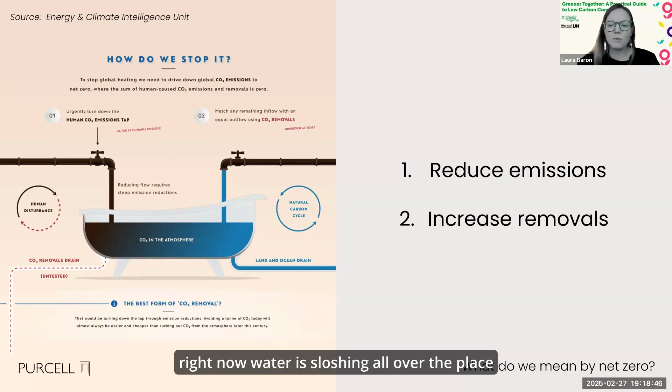The more greenhouse gases in the atmosphere, the more heat is trapped, causing the Earth's temperature to rise and leading to climate breakdown. So really, really simply, if you think of the atmosphere as a giant bath, right now, water is sloshing all over the place because the water pressure is far too high and something's blocking the drain. And if we don't do something, the whole bathroom will be underwater quite soon.

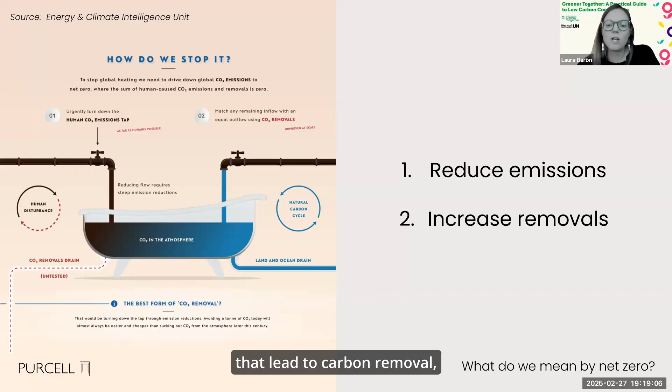So we need to get the atmosphere back in balance and urgently turn down the human carbon emissions tap, and both safeguard and enhance the natural cycles that lead to carbon removal, like halting deforestation, improving soil health, and looking at other techniques like biomass sequestration, storage, and ocean-based approaches like kelp farming. Avoiding emissions now will almost always be easier and cheaper than sucking out carbon from the atmosphere later in this century.

So 2050 is the internationally agreed target for achieving net zero, to have any chance of keeping global temperatures within a safe and just level for humanity. And that temperature is agreed at 1.5 degrees above pre-industrial levels in the Paris Climate Agreement. But we can already see that we don't have any time to waste.

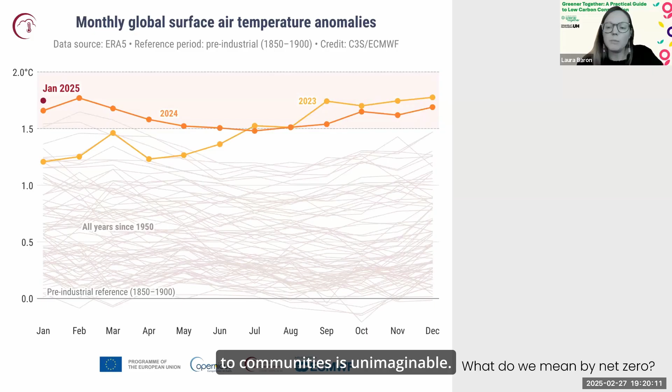2024 was the hottest year ever recorded, and the records haven't stopped so far this year. January reached global average temperatures of 1.75 degrees above pre-industrial level, and was the 18th month in the last 19 months for which the global average surface air temperature was more than 1.5 degrees above pre-industrial levels. And the damage that's having around the world to communities is unimaginable, and I'm not going to dwell on that, because I think we're all here hopefully to focus on solutions this evening.

There is one number that I do want you to remember though, and that's 4,434, because that is the estimated number of tons of carbon dioxide that, if emitted today, cause one excess death between now and the end of the century. So to put that into context, the whole life carbon emissions of a typical new build residential development is about 3,000 tons of carbon. So there's a lot to do.

So I noticed that there's lots of different people from different backgrounds and professions, but I imagine that you've all got an interest in the built environment. Regardless of your motivation for being here, regardless of your background, you will likely spend around 80% of your time indoors. We all have an active stake in the built environment. We inhabit buildings the majority of the time. When we travel, we're probably traveling between one building and another building. We sleep in buildings, we work in buildings, we socialize in buildings, we imagine in buildings, we create in buildings.

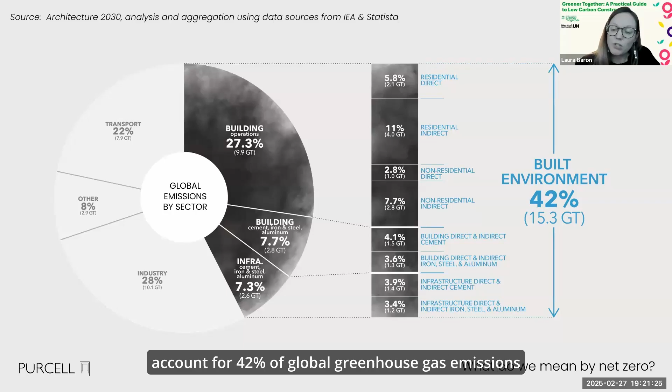So buildings and the infrastructure that connects them account for 42% of global greenhouse gas emissions, and 27.3% of that is how we heat, power, and operate the buildings that already exist. 7.7% is the materials we use to construct new ones, and that's embodied carbon, which most of you are probably already aware of. Because buildings are such a huge part of the problem, it also means that they can be a huge part of the solution. So reducing operational emissions and rethinking the way we use materials is the only way we're going to get anywhere close to net zero in the coming decades.

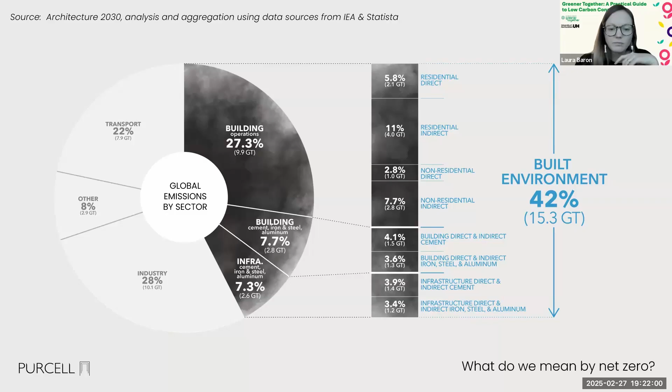So understanding the impacts our buildings are having is essential. And I know there is a session on whole life carbon, but I'm going to just skim through where greenhouse gas emissions relating to buildings can come from. They can come from a number of different sources at a number of different stages in a building's life. So looking sequentially from the raw material extraction and supply, transport of those materials to a manufacturing plant, and the manufacturing and fabrication processes that create new materials and products, the transportation of those products to a project site and the emissions relating to that transportation, as well as the construction and installation process.

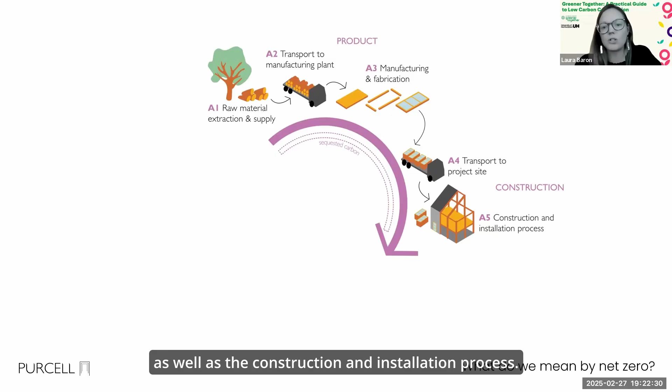And then obviously once a building is complete, the in-use emissions for embodied carbon, that means the maintenance, repair, replacement and refurbishment of a building. Operationally, it is how we heat, power and supply our buildings.

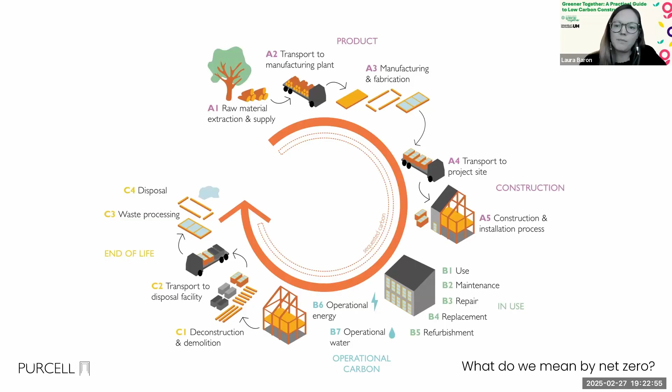Then there's the emissions associated with the demolition and deconstruction of a building when it comes to the end of its life, the transportation of those waste materials, and the emissions associated with the waste and disposal process. But then there might be future opportunities and benefits of reuse, and the more existing materials we reuse, the lower the emissions associated with new material extraction.

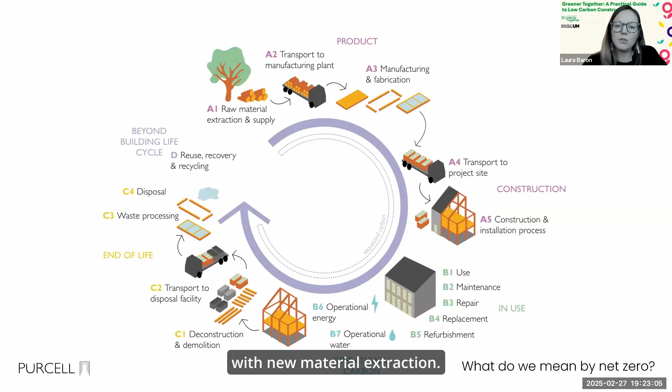And so it's really important to consider all of these processes, regardless of the project, whether it's a new build or a retrofit, because only by accounting for the emissions throughout the whole life of a building can you understand how you achieve a net zero building.

And so some of you may be aware of the UK Net Zero Carbon Building Standard. Some of you may have contributed to it. The pilot version was launched this year. It is the first attempt to robustly define what net zero carbon means for buildings in the UK.

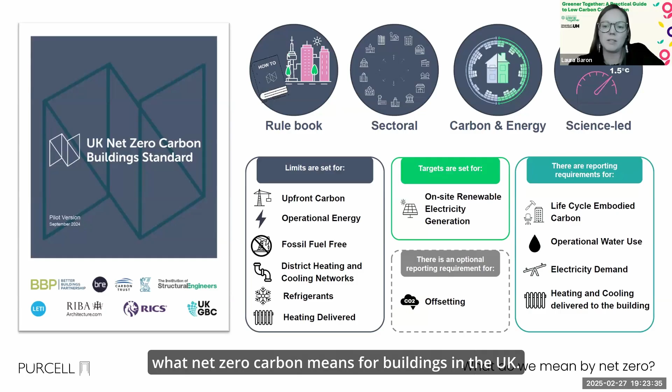So the standard provides a set of consistent rules to create a level playing field around the claims of net zero. It sets performance targets for both new builds and existing buildings, which are aligned with the science-based trajectories needed to achieve net zero by 2050. And that assumes a 78% reduction in emissions by 2035 for the UK.

So the standard is for anyone who wants to fund, procure, design or specify a net zero carbon building, and for anyone who wishes to definitively demonstrate that their building is net zero carbon aligned. It has been developed and agreed through collaboration between built environment organisations and industry leaders, architects, engineers, carbon assessors, developers, with input from over 350 experts from across the industry.

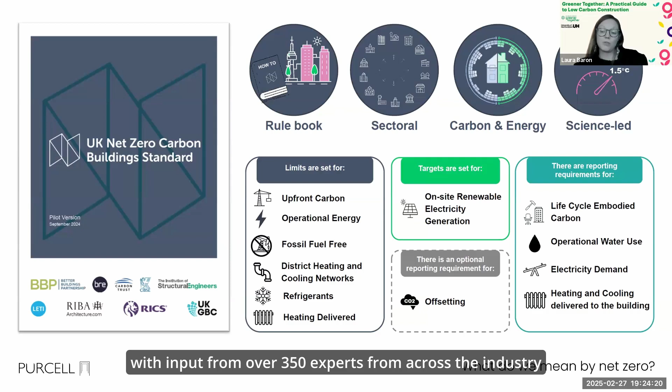And it's quite an amazing milestone. It's quite an amazing feat of collaboration and really worth finding out more information if it's an area that you're working in. I was not one of those 350 experts, so I'm not going to pretend to be an expert in this, and I'm not going to go into more detail than that.

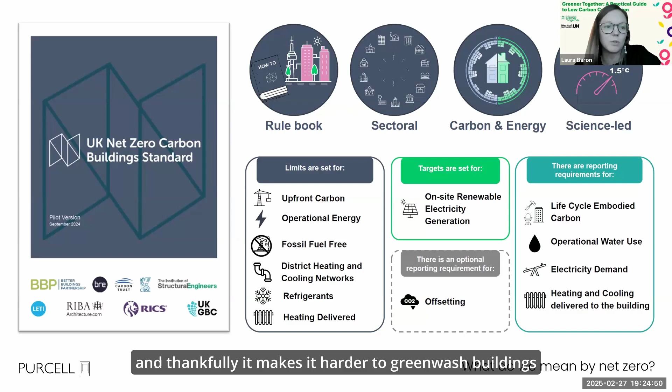But the pilot version is being tested this year with the launch of version 1 planned for next year. And from my point of view, what it really means is it hopefully and thankfully makes it harder to greenwash buildings by claiming net zero when they aren't.

So that was a whistle-stop tour of a lot of information that hopefully you're already kind of aware of. I can't see the chat, but if there's any questions so far on any of that, it might be a bit too early to dive into any. As I say, I can't see the chat. So Luigi, just shout out if there are any. There are no questions for now. Okay, cool. I will keep going.

So the next bit, I'm just going to talk about why retrofit is essential to net zero, and it might already be very obvious to a lot of you. This is quite a familiar statistic to lots of people. So 80% of buildings which will be occupied by 2050, and remember that 2050 is when we're supposed to have achieved net zero, already exist today. So decarbonising these existing buildings is a major priority, whether we like it or not.

But on top of that, the amount of anthropogenic mass, so that's the materials embedded within inanimate, solid, human-made objects, things like concrete and bricks and metals, that mass exceeded the weight of all global living biomass. So that's plants, animals, bacteria, fungi, and that happened in 2020, and we haven't reversed that quite terrifying milestone.

So it's really clear to me that we need to agree that we have enough stuff. We need to nurture our natural resources rather than destroying them. And we need to stop extracting 100 billion tons of raw materials out of the fabric of the planet each year, 50% of which, by the way, is used in construction.

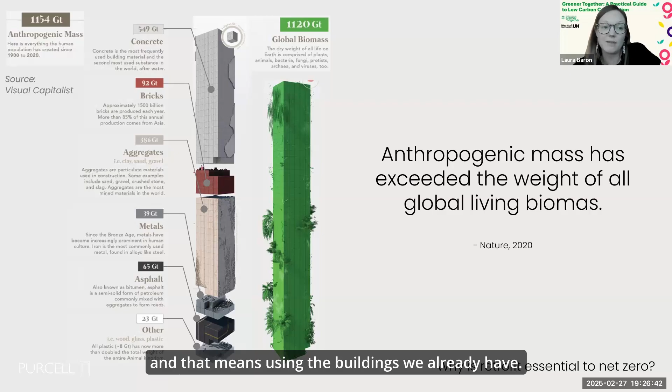We instead need to look to this existing anthropogenic mass as our resource instead of continuing the destructive take, make and throw away cycles. And that means using the buildings we already have. And I know Duncan Baker-Brown will cover the circular economy in much greater and more expert detail.

But the construction industry generates 62% of the UK's waste and 32% of all waste that is sent to landfill in the UK. And again, the solution to this is we need to make use of the buildings and materials we already have and stop sending them to landfill.

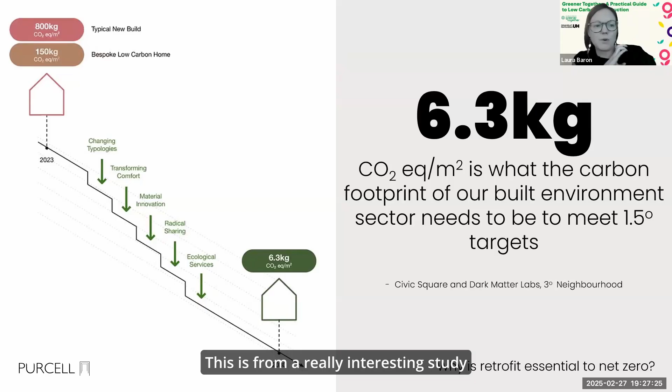Even the most low carbon home built today is still 24 times the carbon emissions every new home will need to be in 2030 if we are to meet the 1.5 degree target that is agreed. At the current pace, we have 5 more years of carbon budget for building new homes at their average current embodied carbon. This is from a really interesting study that's worth having a look at by Civic Square and Dark Matter Labs called the 3 Degree Neighbourhood.

And again, the solution to this: reuse the buildings and materials we already have. And I reflect often on these words of the French architects Lacaton and Vassal. So never demolish, never subtract, remove or replace, always add, transform and utilise with and for the inhabitants. And I think there you can find some really imaginative and inspiring architectural solutions when you take that approach.

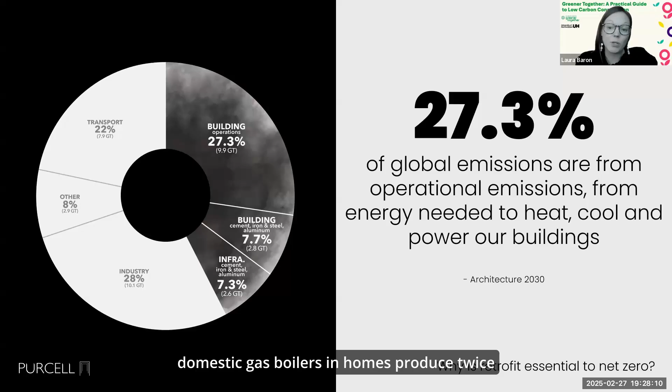But our existing buildings are far from perfect. They are still responsible for 27.3% of global emissions through their heating, cooling and powering. And here in the UK, domestic gas boilers in homes produce twice as many greenhouse gases as all the gas-fired power stations combined. So again, it's not a small challenge that we're facing.

It costs the NHS £1.4 billion a year to treat people impacted by poor quality housing. And when you add on the full cost for society, like the cost of care, loss of productivity and time off work and things, poor housing costs the UK £18.5 billion a year. There's 2.6 million homes in England, which is 11% of the country's housing stock, which are categorised as hazardous to occupants. And the costliest issue for the NHS is poor quality housing that leads to excess cold and damp, usually caused by poor maintenance, lack of insulation and lack of ventilation.

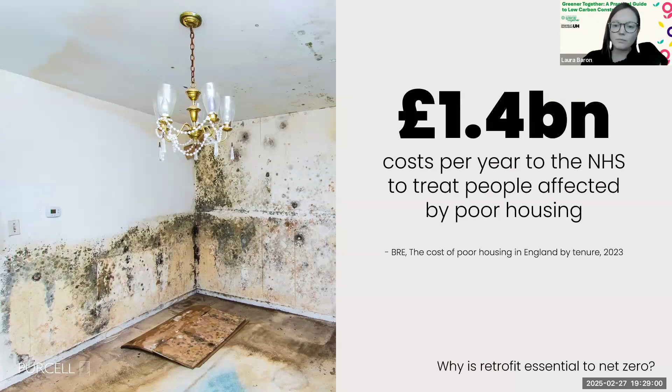In 2022, instability in energy markets, coupled with some of the most energy inefficient housing in Europe, led to 13.4% of households in England living in fuel poverty. So that's when a household needs to spend at least 10% of its income on maintaining a satisfactory heating regime.

And it's obviously not just about being cold, as we saw earlier on in the presentation. 2024 was the hottest year on record and likely the warmest in at least the last 125,000 years, even though it didn't necessarily feel like that in the UK. It's now more than likely that those born today will experience a planet that exceeds more than 3 degrees above pre-industrial temperatures, and anything above 1.5 we will see from where we stand today, to be honest.

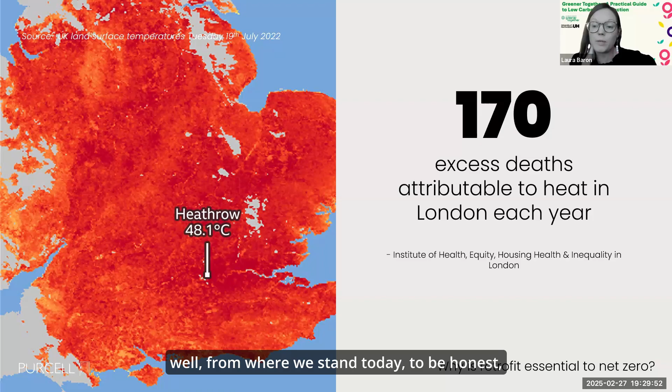Flooding will happen more often and cause a greater degree of damage to our homes and communities. Storms will be stronger and more frequent, damaging power lines, homes and transport links. Summers will be hotter and likely dangerous, and the loss of predictable seasons will lead to food insecurity and global instability. So retrofit must be about carbon emissions and net zero, definitely, but it must also be about resource use, about health and well-being, equity and energy security. And we need to be aware of and prepare for the worst future climate, but also build towards a more resilient and hopeful future.

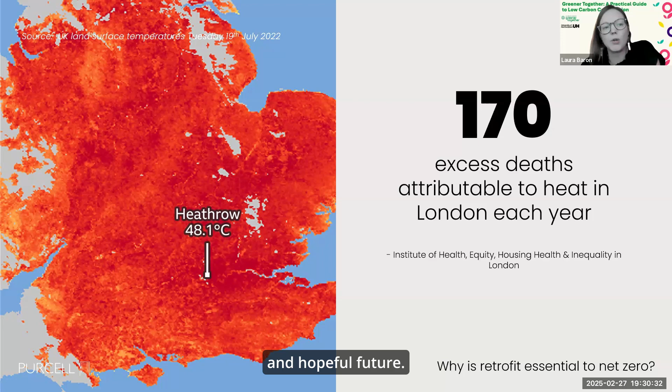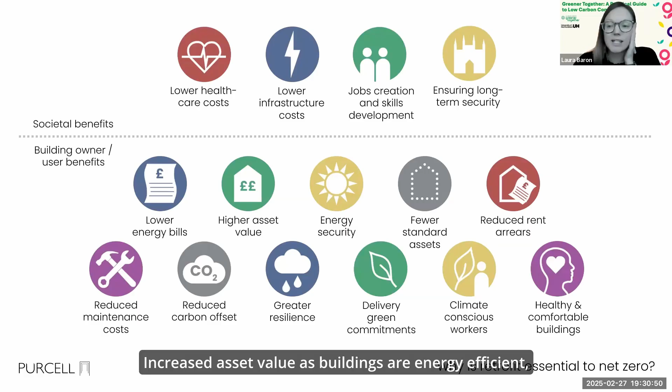And that is possible. If done properly, retrofit can solve a lot of these problems. I'll list off some of them. So lower energy bills if the building is substantially more energy efficient, increased asset value as buildings are energy efficient, comfortable and durable, improved energy security, reducing energy consumption and integrating renewables, reduced risk of stranded assets by ensuring they remain relevant and usable, reduced rent arrears and void periods, because tenants potentially have lower bills. Reduced maintenance costs, particularly where old systems can be upgraded.

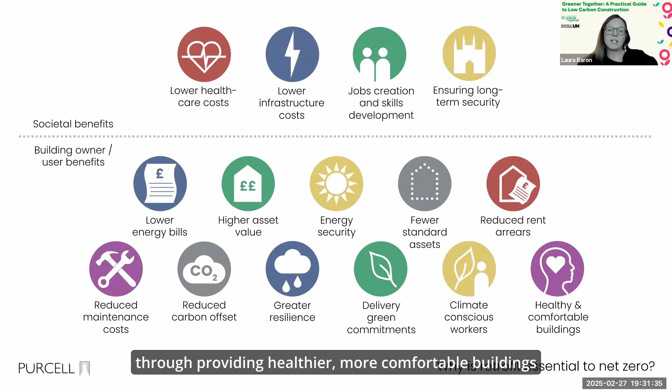Reduced carbon offset removal costs for the long term, build greater resilience against the impact of changing climatic conditions, delivering on green commitments for businesses and other net zero pledges, attracting climate conscious workforce and clientele, providing healthier, more comfortable buildings, and improving productivity and well-being.

And then at a societal level, of course, we've got lower healthcare costs with occupants living in and working in healthier buildings, lower infrastructure costs with energy demand and peak loads reduced, job creation and skills development, because retrofit is a more labour intensive activity than new build, and ensuring the long-term security and relevance of our existing buildings, and in particular our built heritage.

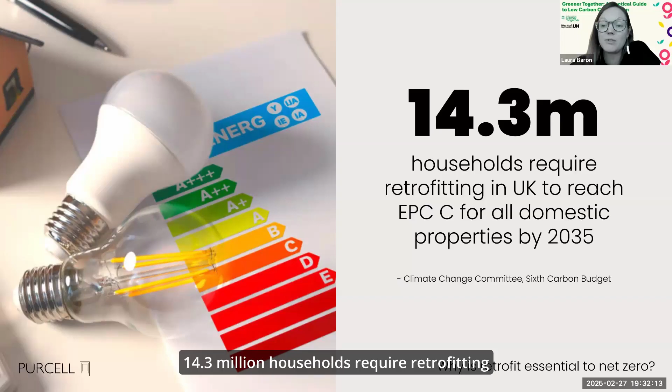So if it's so great, what's stopping us? The scale of the challenge is quite enormous. 14.3 million households require retrofitting in the UK to reach EPC C for all domestic properties by 2035. And according to the National Retrofit Hub, to deliver retrofit proportionally across 10 years in England, the current rate of 250,000 homes per year must rise to 1.5 million per year by 2035, totaling 11.8 million retrofits. So there's a lot to do, and retrofit doesn't always go to plan.

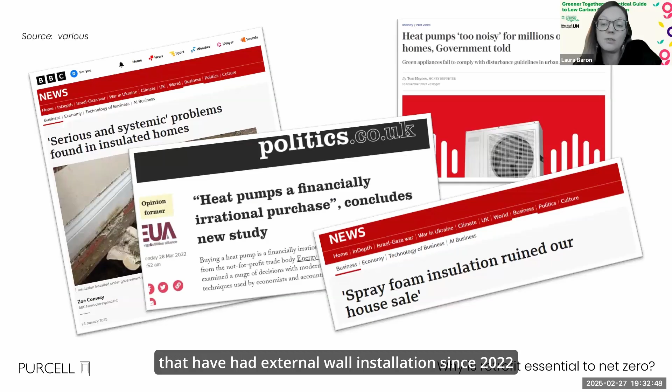A very recent audit of homes that have had external wall insulation since 2022 found widespread cases of poor quality installations that did not meet the required standards, with serious and systemic problems found in homes insulated under government schemes, ECO4 and the Great British Insulation Scheme since 2022. So what does good retrofit look like?

I'm going to ask again, just in case there's any particular questions relating to that before we dive into what good looks like. No question yet. Perfect. Okay, I'll just keep going.

So yeah, what does good look like? First of all, I've been bandying around the word retrofit all evening without properly defining it. And the dictionary definition of retrofit is simply the addition of something, a component or accessory, to something that did not have it when manufactured. And so in that sense, we've been retrofitting our buildings for as long as we've had buildings.

But within the context that I'm using it this evening, I like the LETI definition of retrofit, which is the upgrading of a building to enable it to respond to the imperative of climate change, because that definition captures both the mitigation measures needed to reduce carbon emissions, but also the adaptation measures needed to prepare our buildings for a changing climate, both of which I believe are of equal importance.

So thankfully, there are tons of guidance documents on what good retrofit looks like. It is not a new concept, and especially recently, organisations have been ramping up their efforts to try and encourage the retrofit of all types of buildings, but particularly residential. We are going to drop the links of all of these into the chat towards the end, and I've got a slide at the end that's got all the direct links, but they are freely available on the internet and all very useful and relevant.

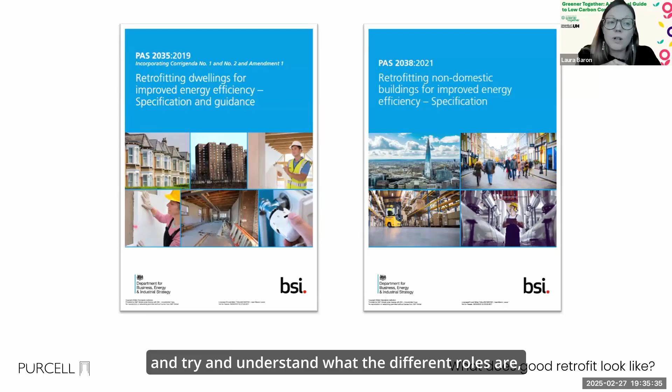They are meaty, wordy documents, but if you are working on a project that requires compliance with either of these, I very much recommend you get hold of a copy and try and understand what the different roles are, because both of them have slightly different role requirements for the different stakeholders and slightly different methodologies, but both very useful documents.

So if you live in Hertfordshire, the Hertfordshire Climate Change and Sustainability Partnership have a guide to retrofitting your house, and it looks at a number of different house typologies, and it's actually a really good guide. What I really like about it is it shows you a breakdown depending on the level of intervention that you want to take. So you can better understand the typical impact of a shallow retrofit, which might just include a few low-cost basic improvements, versus a deeper retrofit with more invasive fabric improvements, mechanical ventilation and heat recovery, air source heat pump and renewable energies.

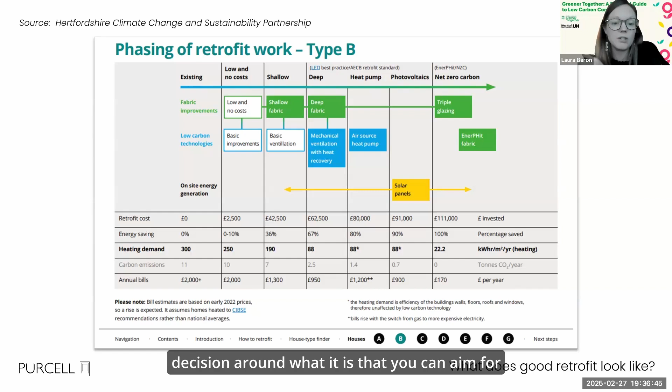And it gives you an indication of budgets and an indication of the energy savings you might expect, and you can make a more realistic decision around what it is that you can aim for in the short and the long term.

I have to drop in the Low Energy Transformation Initiative, also known as LETI. If you aren't familiar with the guides that they have produced, please Google them because they are really, really brilliant. And they have this climate emergency retrofit guide, focused specifically on residential retrofit. What they do really well is set clear targets for energy use, U-values, airtightness. So it's a really practical outcomes-based approach.

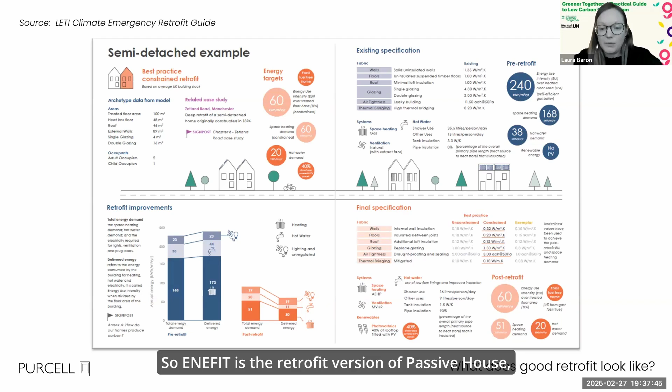And they split the different targets into best practice categories, and within that category they have both unconstrained and constrained targets, the latter being where there are spatial constraints or planning and heritage constraints. And then they have an exemplar category, which is based on the EnerPHit standard. EnerPHit is the retrofit version of Passive House, which is a quality assurance standard aimed specifically at the design and delivery of low energy buildings.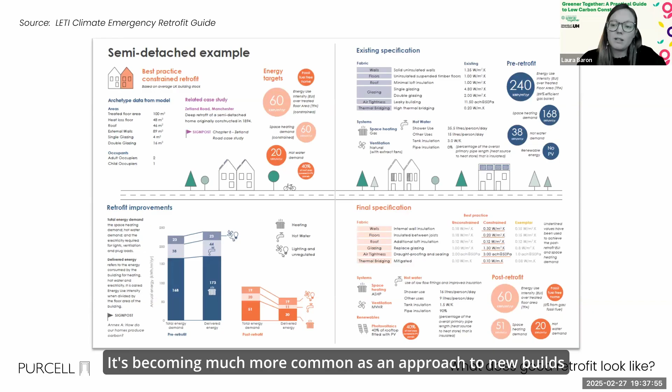It's becoming much more common as an approach to new builds, and EnerPHit is becoming more common within the retrofit space as well. The general approach advocated by the Passive House Institute is if you do it right, basically. And even in existing buildings with the approach advocated by Passive House Institute, you can see significant heating and cooling energy savings of between 75 and 90%, which is very impressive.

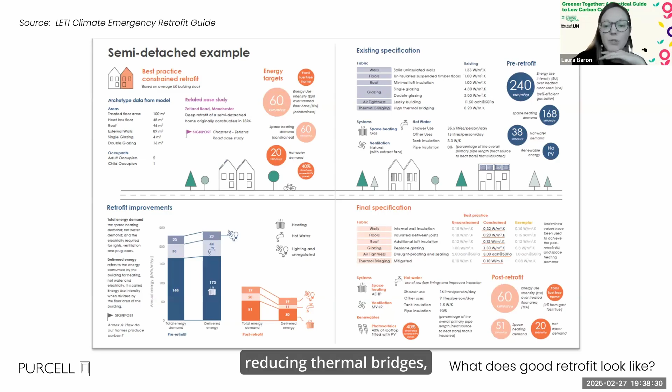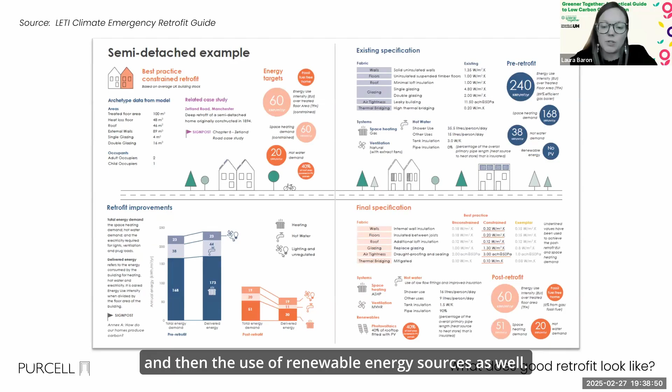And the approach looks at improving thermal performance quite significantly. So looking at insulating walls, roofs and floors, reducing thermal bridges, considerably improving air tightness, using high quality windows, often needing triple glazing, introducing ventilation with heat recovery, having an efficient heat generation strategy, usually air source heat pump or something similar, and then the use of renewable energy sources as well. It is exemplar for a reason.

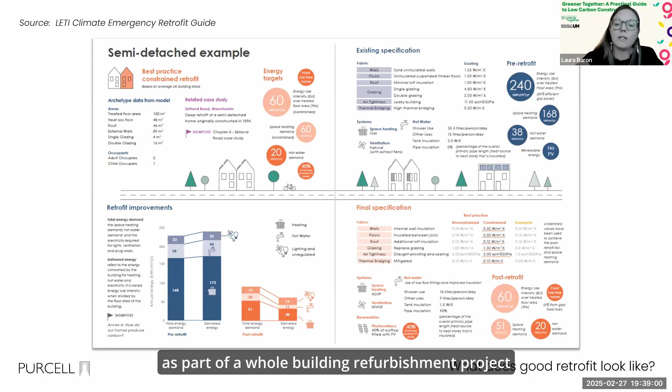It is a challenge. Particularly with EnerPHit, it is often most appropriate as part of a whole building refurbishment project in an unconstrained site. So I've yet to see it done, someone might tell me I'm wrong, on a large scale listed building, because the targets that are set are challenging. Though you can achieve the same results in stages, it isn't easy. So it's often kind of done in one go.

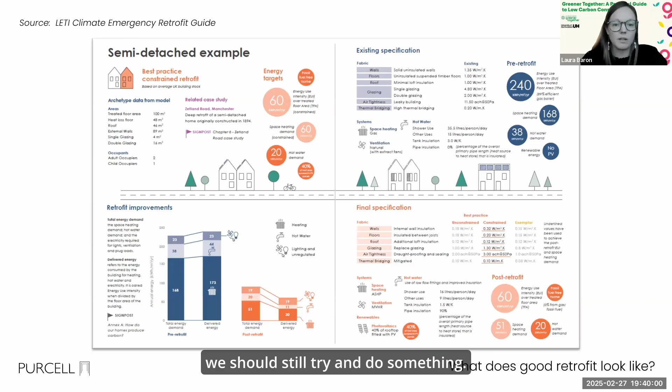And EnerPHit is an amazing goal, and the process and methodology it uses is incredibly thorough. And I would advocate for people to seriously consider it as a benchmark for any retrofit project. But at the same time, I believe we shouldn't let perfection get in the way of progress. So if we can't achieve the best, we can use the principles and the methodologies, but if the constraints of cost, site, time make that too difficult to achieve, we should still try and do something. We shouldn't be put off just because we can't get a certificate.

So the most important part of any retrofit, whatever measure you decide to take forward or not, is to remember the building is a system of interconnected users, services and materials. So altering one part of the system will have an impact on other parts of the system. So for example, if you change your window and there's less light getting in through your window, you might need to turn your electric lights on more, which will have an impact on your energy use, which will also have an impact on comfort or how you use the space. And so all of these different components are connected, and understanding that just as a principle is the most important first step.

So as part of our Heritage Building Retrofit Toolkit for the City of London, we developed a process to try and navigate the complexity of retrofit, specifically in heritage settings, but there is absolutely no difference in approach really for any retrofit project, because this is based on the documents that I mentioned before, the PAS 2035 and 2038 processes.

So I'm going to talk through these 9 steps in a bit more detail and throw in some case study examples as well. And I think it's worth pointing out again, because Purcell are heritage architects, that the case studies that I'm showing are for listed buildings, which may not be relevant to a lot of problems that you are all trying to solve. But at the same time, I kind of think if you can achieve some of these results in the most constrained and significant sites, then there's no real excuse to not be able to do it in unconstrained sites.

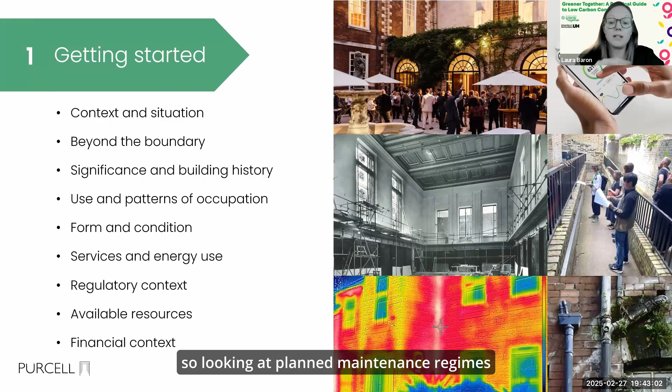How the building's being used, what is it used for, and what are the patterns of use, and also thinking about its current and future climatic context. So is it likely at a high risk of flooding, for example? And then also from a project perspective, understanding the financial context of the owners and occupiers of the building, and how they maintain and look after their building. So looking at planned maintenance regimes and any potential capital works projects that are coming up. If you're looking at a domestic project, is the resident thinking of changing their kitchen at some point in the near future, and can that be kind of wrapped up in an energy efficiency project as well?

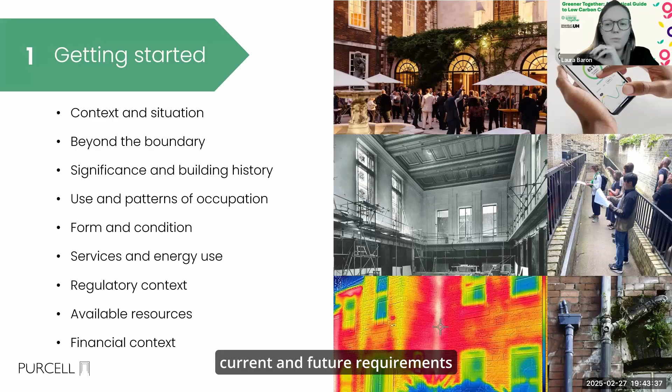Energy use is really significantly impacted by occupant behaviour, particularly in existing buildings. So understanding the patterns of use, types of occupants, and their current and future requirements should feed into any baseline analysis. The more information gathered at the outset of the project and the more expertise during the early stages, the more informed the strategy, the greater an understanding of the impact of the decisions, and the lesser the risk.

And the more studies you can do around heat loss, particularly with technologies like thermal imaging cameras, in situ U-value calculations, things like that, to get a better understanding of how the existing fabric is performing, the lesser the risk, and the easier it is to find solutions as you go down the line.

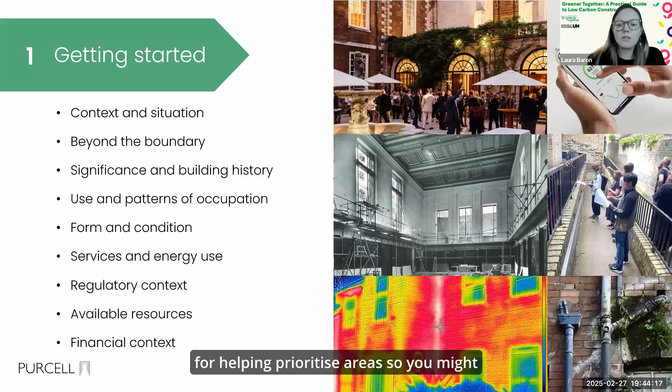And if you have multiple buildings or a large estate, this stage is also really useful for helping prioritise areas. So you might identify that there are particular buildings that are in a significantly poorer condition than others. There might be one building where the boiler is coming to the end of its life soon, and you'll need to consider a replacement strategy for that. Are there large-scale capital works projects in the pipeline that will affect particular buildings? So this stage is all really about informing how you make decisions later on, particularly around phasing and technical details.

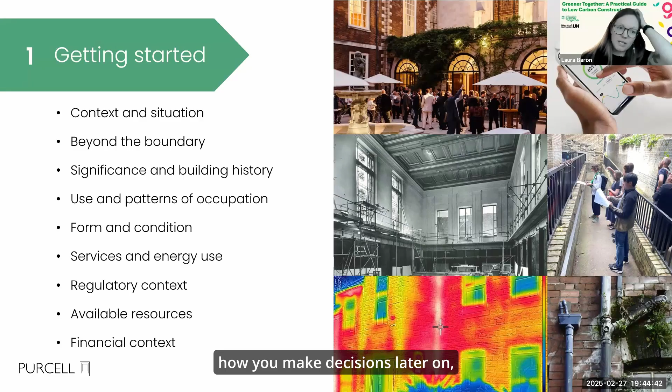So next up, we've got risks, and it's up front for a reason, because there are many risks when embarking on a building project, but working with existing buildings involves greater uncertainty, often associated with unknown factors like building condition, concealed defects, complex forms of construction, and specialist building techniques. These things can have consequences when you're trying to develop robust cost plans. There are risks associated with gaining planning and listed building consent, particularly when you're trying to make changes to heritage buildings. And this can obviously impact timeframes and budgets. So thinking about risks early on is really important.

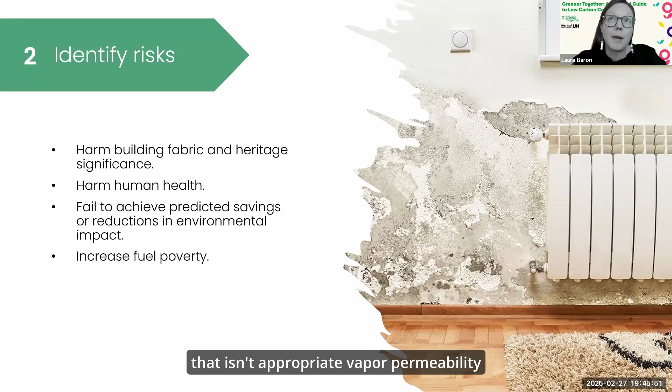And it's also important to think about the potential risks of the adaptations you might be about to make. So the insertion of fabric efficiency measures and renewable energy sources might have unintended consequences if they're not considered and planned properly. So being aware of that is really important. For example, putting on external wall insulation that isn't of appropriate vapour permeability might harm the building fabric, trap moisture and cause issues to human health, where there is moisture accumulation or lack of adequate natural ventilation.

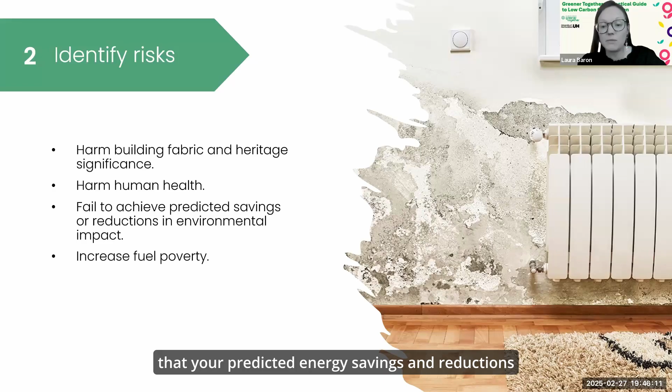Not fully understanding the thermal performance of the existing fabric might mean that your predicted energy savings and reductions are lower than what you'd anticipated. So that will have a lesser environmental impact than you'd hoped. And swapping out fuel source without fully considering what you're changing to or what the impact of it is could increase the risk of fuel poverty as well. So they're just a few.

So one of the things that is quite important to identifying the risks is understanding how your building is designed to behave in terms of moisture and air movement, because one of the bigger issues with retrofit, particularly with recent studies that came out early this year, is around wrongly specified materials in particular situations. So the age of a building can have a significant impact on this.

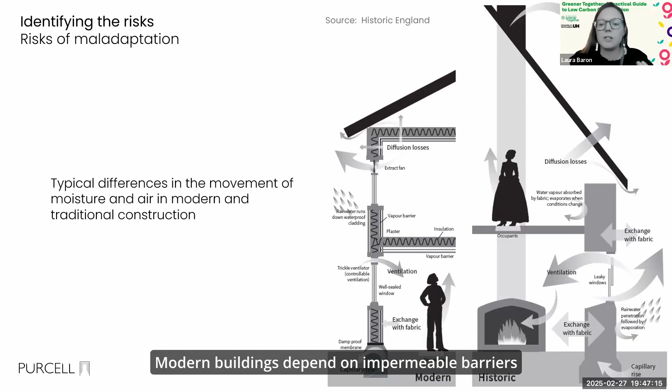In the UK, for historic and traditionally constructed buildings, we refer to anything that was built pre-1919 as a traditionally constructed building, and they behave very differently to modern buildings. Modern buildings depend on impermeable barriers to control the movement of moisture and air through the building fabric. So things like vapour control layers, impermeable cement renders and things.

In contrast, traditional forms of building construction, often solid wall construction, take up moisture from their surroundings and release it according to the environmental conditions. They also tend to have a greater thermal mass than their modern counterparts, meaning that they heat up and cool down more slowly. And this ability to passively regulate moisture and heat helps to even out fluctuations in humidity and temperature.

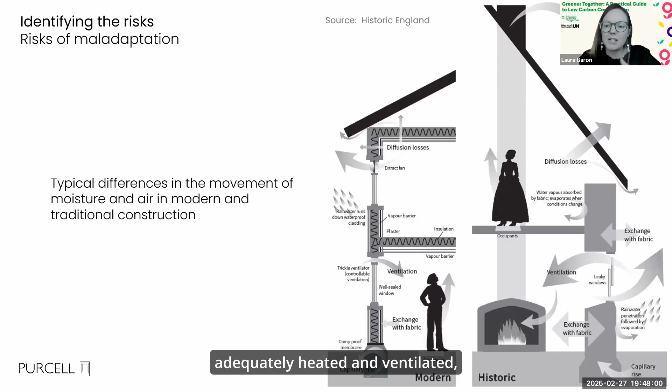So the interrelationship between heat and moisture in traditional buildings is complex. In a well-maintained building that is adequately heated and ventilated, the daily and seasonal cycles of wet, dry, hot, and cold balance out naturally.

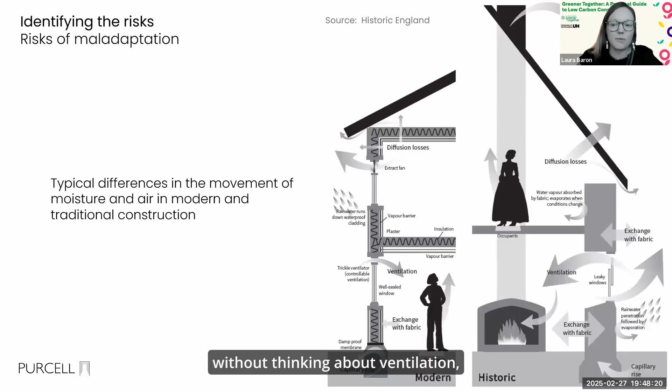But if you alter the building fabric to prevent this from happening and prevent this movement of air and moisture by, for example, the application of impermeable materials and excessively sealing the building up without thinking about ventilation, this can lead to problems of moisture accumulation, overheating, fabric damage, and poor indoor environmental conditions.

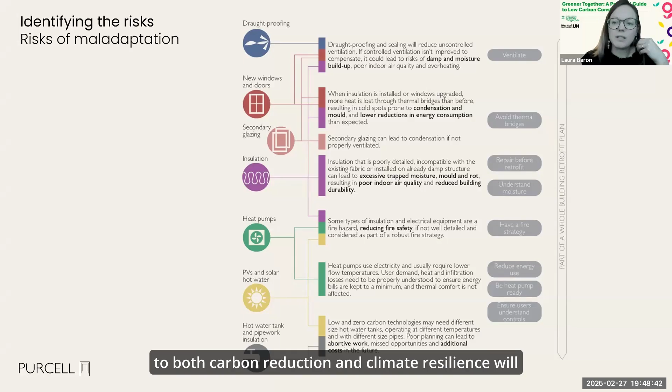So understanding the basic principles of building physics that you're dealing with and the existing state of it is really crucial to reducing risks. And then adopting a risk-based approach to both carbon reduction and climate resilience will facilitate proper planning and consideration. So, for example, knowing that insulating and sealing up a traditional building reduces natural air movement ensures you then have a properly planned approach to ventilation.

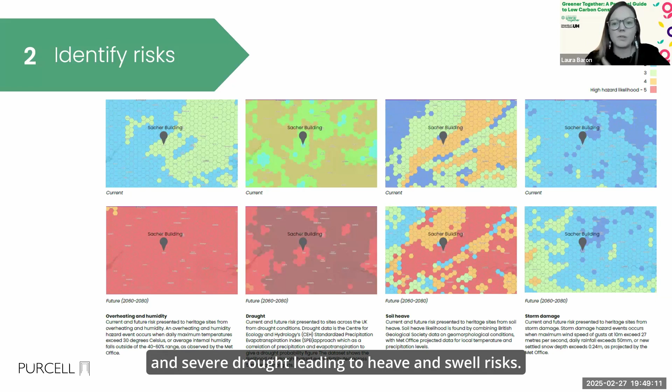And then obviously we've also got the increasing frequency and severity of many physical climate hazards which are impacting our built environment, including extreme flood events, increased rainfall, warmer temperatures, and severe drought leading to heave and swell risks. It's also introducing new hazards that could impact buildings, such as the spread of new and invasive pest species.

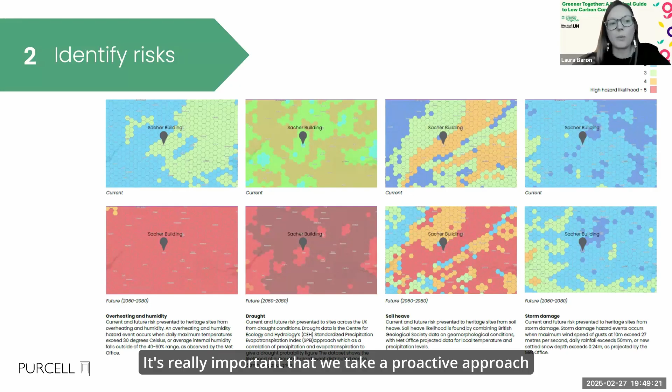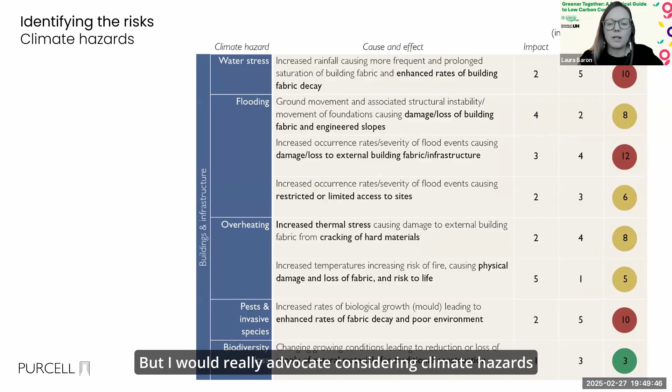It's really important that we take a proactive approach to this, even though it might feel like an extra stress and scary thing to think about. But understanding and managing both individual and overall risk events, setting out clear strategies that either eliminate or reduce the threat or work to mitigate the consequences is really important. You can do that through a really simple climate hazard risk assessment or just project hazard risk assessment, but I would really advocate considering climate hazards as part of any of your normal risk assessment.

Regardless of complexity, all retrofit projects should consider the potential impact of hazards created by climate change, particularly things like overheating if you're insulating. And you really want to consider that you're not exacerbating, making an existing condition worse.

Okay, I'm just going to take a sip of water.

So the third step is to identify the opportunities to reduce carbon emissions and build climate resilience. This should hopefully follow a whole building approach, and that's where the consequences of every retrofit measure are fully understood and the building is considered as a system, like I mentioned earlier. So the whole building approach uses an understanding of a building in its context. It finds balanced solutions that save energy, promote occupant health and comfort, and sustain the significance, if there is heritage significance, or the public benefits. It considers the building as a system of interconnected materials, and interventions are designed to work together to deliver the maximum benefits as effectively as possible.

So we use this hierarchy because it's quite useful to work through a process of how you identify energy saving opportunities. And we try and work on the assumption that the greenest and cheapest energy is the energy you don't use. There is no one size fits all solution to making energy and carbon reductions in buildings. Every building, even if it looks the same from the outside, will have been adapted and changed at some point in its history. But priority should always be given to measures that eliminate unnecessary energy wastage.

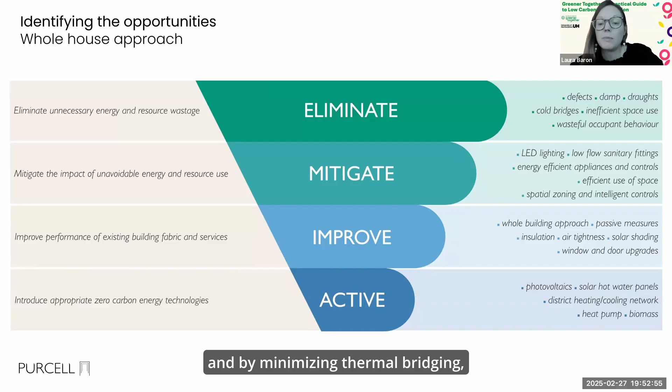And then implementing low-hanging fruit measures that mitigate the impact of unavoidable energy use. I often think of these as the low cost and easy to install measures with limited impact on the operation of the building. So things like energy efficient lighting is a really easy one, basic heating controls and better control settings. And then looking to improve the building fabric by means of insulation, air tightness measures, and by minimizing thermal bridging is likely to reduce heat loss and heat demand even further, and then reduce the required capacity of the heating system. But those measures are obviously more intrusive and need to consider the movement of the air and moisture, as we talked about before.

And then that final strand, the active systems, by that we mean mechanical and electrical solutions that are low or zero carbon and renewable. And they are obviously a vital part of achieving net zero carbon emissions. But if you jump to these measures without first at least working through the other steps to seek to reduce energy demand, you could end up with a new energy source that will need to be larger and work harder and ultimately cost more to install and to run.

So I like to start from the top down, working through components. So roof first, because heat rises and rain falls, so it makes it a logical place to start. So roof, walls, windows, floors, etc. Make a list of all the possible opportunities associated with each of those components, and then put everything on the table at the start and work logically through the pros and cons of each.

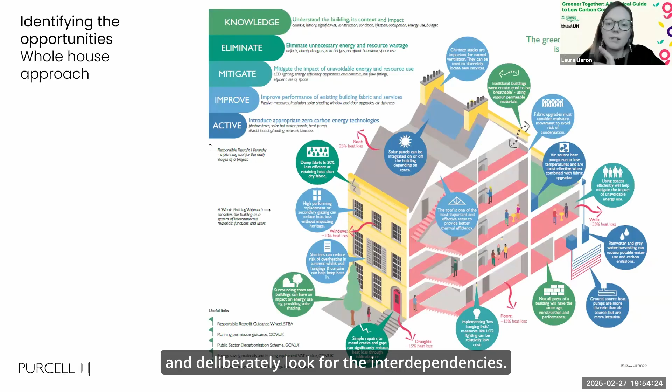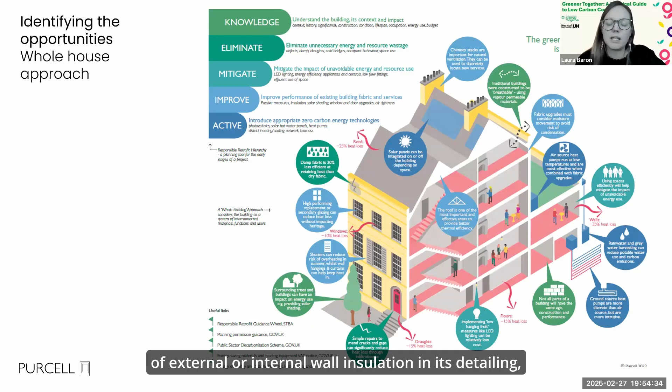It also helps then to create an itemized cost plan in this way as well, and you can see how they link to each other, and deliberately look for the interdependencies. So for example, does upgrading a window need to also consider the potential future application of external or internal wall insulation in its detailing?

So there may be multiple options for each component, each with different benefits and constraints, which will be dependent on the specifics of the building location, the specifics of the users, the appetite of the building users to live with disruption, and then weigh up the options objectively to find outcomes that are right for the building.

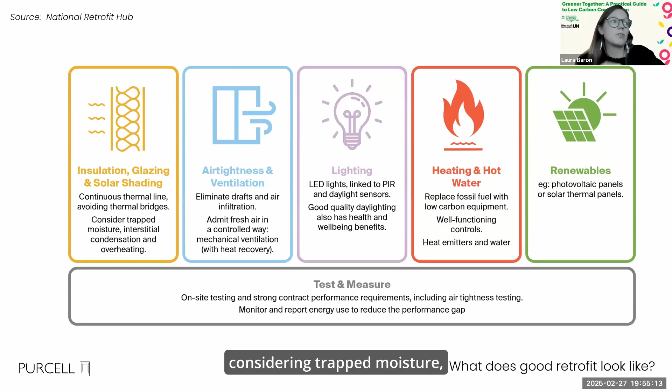So the key areas to consider are the thermal envelope, so insulation and glazing, looking for a continuous thermal line, avoiding thermal bridges, considering trapped moisture, interstitial condensation and overheating, and then air tightness and ventilation, looking to eliminate drafts and air infiltration, lighting, but also other electrical and powered items, but again, looking for efficiencies there.

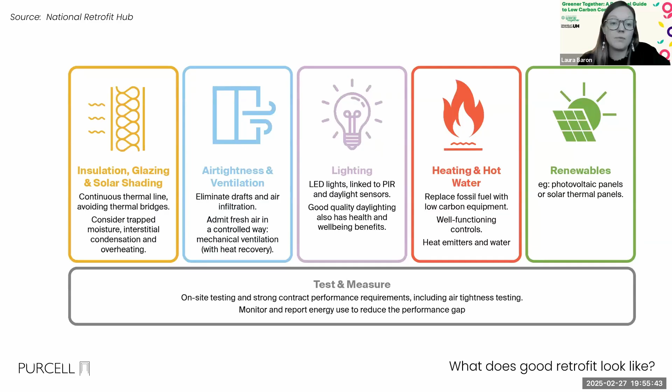And then heating and hot water, replacing fossil fuels is essential to getting to net zero. So how we do that in a phased and sensible way. And then renewables and opportunities to put photovoltaics, solar thermal, other opportunities.

So for example, keeping the building in a good state of repair and increasing inspections and regular maintenance will reduce the risk of damage caused by water ingress from flooding and extreme weather events. Maintenance is really, really important. So rainwater goods will be kept clear and leaks and other defects will be caught early.

So what that means is that this measure will also reduce the reliance on global supply chains by prolonging the lifespan of the building's fabric, and reducing the demand for materials and pressure on resources, infrastructure, and biodiversity. So there are lots of interlinking solutions.

So once you've worked through all the opportunities and selected what is right for the building for the long term, they can be pulled together into a whole building retrofit plan. So a retrofit plan is a master plan for all the individual pieces of work needed to improve the building and how these interrelate. This means that when one piece of work is carried out, it considers the impact on future phases. The retrofit plan might change over time, but gives a snapshot of the intentions and helps think through the consequences of all the different phases.

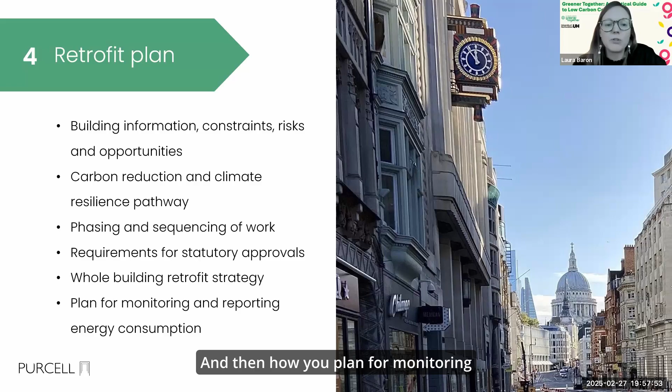So it should include things like the building information, constraints, risks and opportunities, all the information that we did in step 1, and then the carbon reduction, climate resilience pathway, setting clear targets and actionable measures, the phasing and the sequencing of the work, what the requirements are for statutory approvals and consents, what the whole building retrofit strategy is, and where you are along that plan. It's often an evolving document which can change over time. And then how you plan for monitoring and reporting energy consumption in occupation.

So a retrofit plan doesn't need to be carried out all in one go. It can be phased, but should consider the consequences of each phase on subsequent phases. So this is quite different to a conventional approach to refurbishment, which is to change each element individually without considering the building as a whole.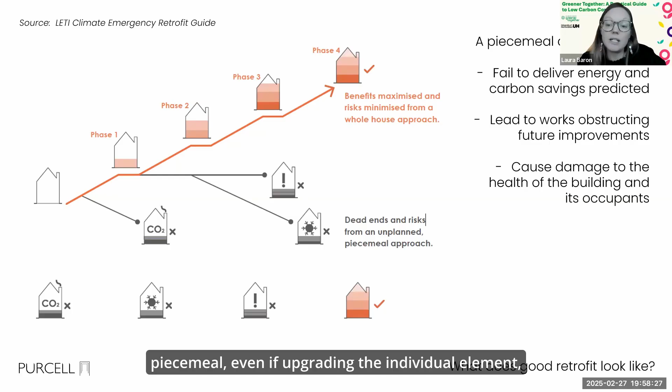Carrying out a single piece of maintenance or improvement works as an opportunity arises is not a problem in itself, but it needs to be part of the phased and planned retrofit approach, because dealing with different parts of the building piecemeal, even if upgrading the individual element, can result in negligible energy and carbon savings and potentially damage to the building.

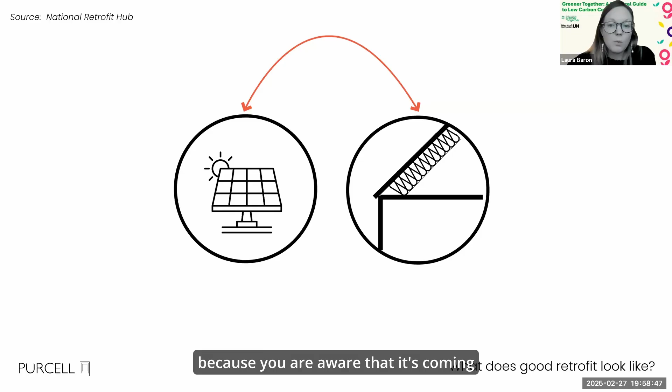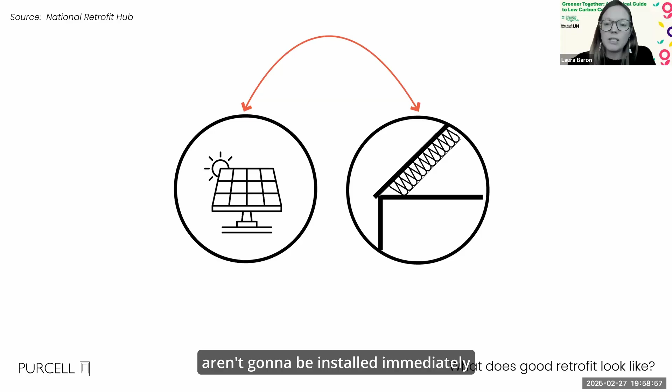So a whole building approach can deliver the most benefits and avoid unintended consequences. And a good example of this is if you think about a roof. If you need to upgrade a roof because you are aware that it's coming to the end of its life, is that a perfect opportunity to properly insulate it and ensure it is possible to easily install solar panels, even if the solar panels aren't going to be installed immediately because they're not part of the budget?

It would be a missed opportunity if it wasn't properly planned, and when solar panels were considered later on, it wasn't possible because it hadn't been designed into the roof redesign. So plan for future changes and understand what comes next so abortive work is eliminated.

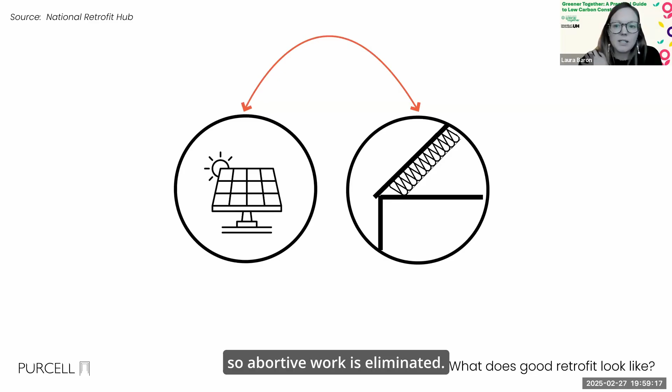So the 5th step, we've kind of already talked about a little bit, is about building a business case. And so we've talked about the benefits of retrofitting buildings that go beyond carbon emissions, to creating healthy, comfortable indoor environments, energy security, reducing risk, and increasing market value and avoiding stranded assets. And clearly identifying these benefits and understanding any external funding opportunities particularly will help build a stronger business case for the work.

And it's important that the business case aims to cover the whole life cost of a building, so including energy and maintenance savings and increased asset value that comes with the work. So the cost of alternatives should also be included, and the value of non-financial benefits should be considered, so those health benefits, for example. And by modelling the savings identified in energy performance over time against the cost of the investment, that can also help with the business case for a retrofit.

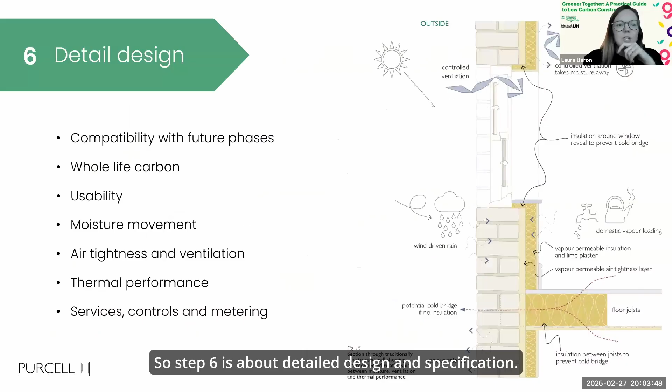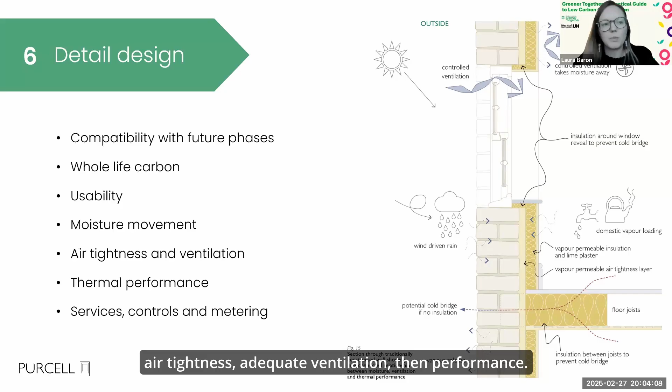So step 6 is about detailed design and specification. And again, I don't want to reiterate the same things, but it's taking into account those issues around the materials that we're specifying, how our building's performing, particularly with things like vapor permeability and moisture movement, air tightness, adequate ventilation, thermal performance. But the other thing to think about is the whole life carbon impact of the materials that we're using.

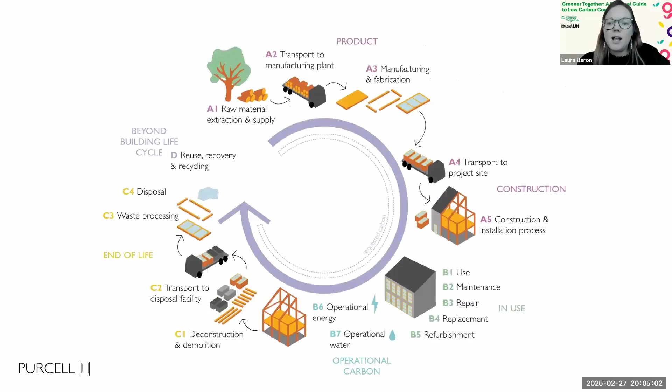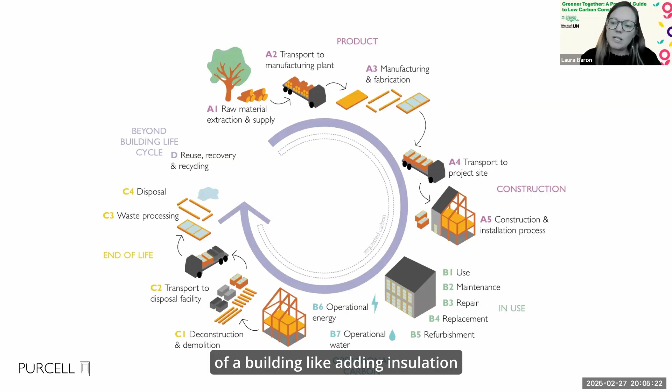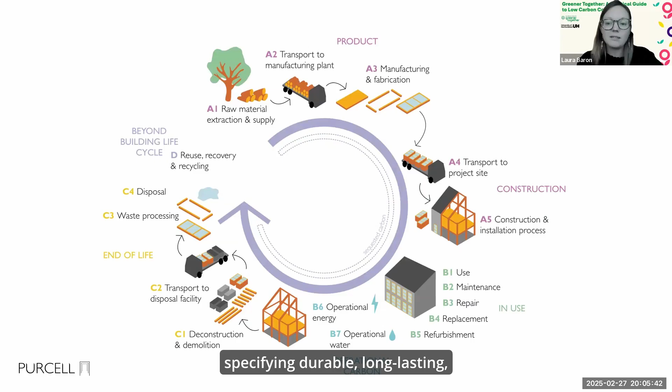You can minimize embodied carbon emissions in a retrofit project by eliminating new materials where they're not needed, reusing existing materials as much as possible, specifying durable, long-lasting, low embodied carbon materials, often bio-based materials, and avoiding over-specification of services.

So step 7 is just about seeking relevant approvals, and it's just a note, you're probably all very well informed about the requirement, particularly if you're in a conservation area or if your building is listed, retrofit measures will need some form of consent. So it's best to consult with an expert or the local authority and confirm approval requirements in terms of planning. The other thing to be really cognizant of is building regulations and the overlapping of building energy efficiency measures, particularly when it comes to things like fire, and party wall awards as well, which energy efficiency measures can often impact.

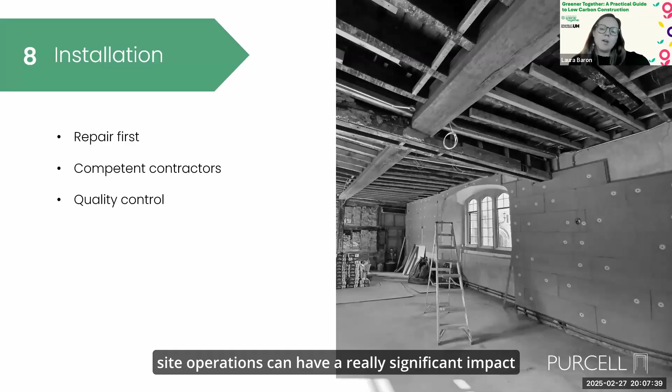And I suppose on the installation, site operations can have a really significant impact on the effectiveness of a retrofit project. So find a contractor who's familiar with your building type and the construction methodology that you're hoping to use, and who shows an interest in what you're trying to achieve, because it's really important that on-site quality assurance is maintained, because that can really make or break a retrofit project.

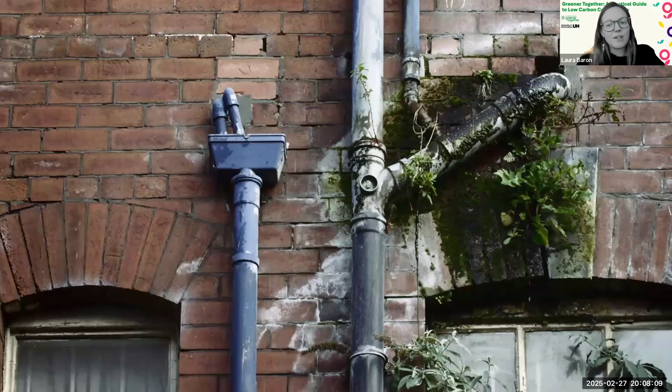And to reiterate, it is really, really important to make sure that you've dealt with any defects before starting a retrofit project. There is no point adding insulation to a wall that's got damp, because it won't get any better, and it will mean that your wall is very inefficient, and it's a complete waste of time.

And this is my final case study. I appreciate that we're coming up on time. So this is St John's College in Cambridge, and again it's a Grade 1 listed building, but primarily to demonstrate to you what can be achieved in the most sensitive settings. And so here we took the opportunity, as part of a capital works project, to take out an old concrete floor, which was not original, and put in a new foam glass insulated limecrete floor.

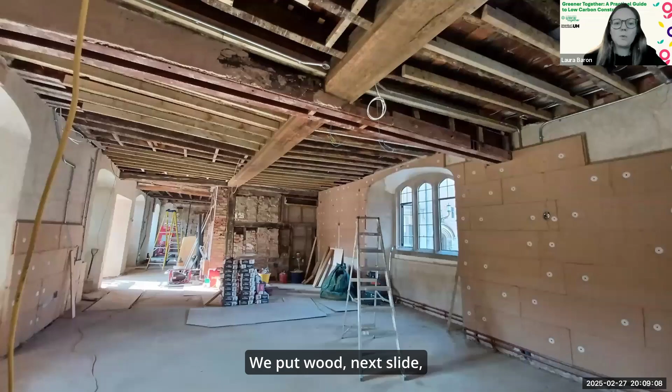We put wood wool insulation on the walls, and installed a heat pump, underfloor heating, and there's ventilation tracks that run down the sides, you can't see on this particular slide, and window upgrades, and we were able to achieve a 39% reduction in peak heat demand in this Grade 1 listed building, which is very positive for the college.

There's the windows. We sadly weren't able to put in double glazing because the conservation area officer didn't approve it, but we were able to reuse the existing frames, which is good.

And then finally, the last step, the ongoing monitoring and long-term oversight of the delivered outcomes will be key to understanding the impacts of any retrofit projects. Basically, just learning from the lessons of a project, feeding back into the knowledge for the next project. So testing the completed building against the original brief, talking to the users, ensuring the correct operation, and feeding back lessons for future projects is really, really important.